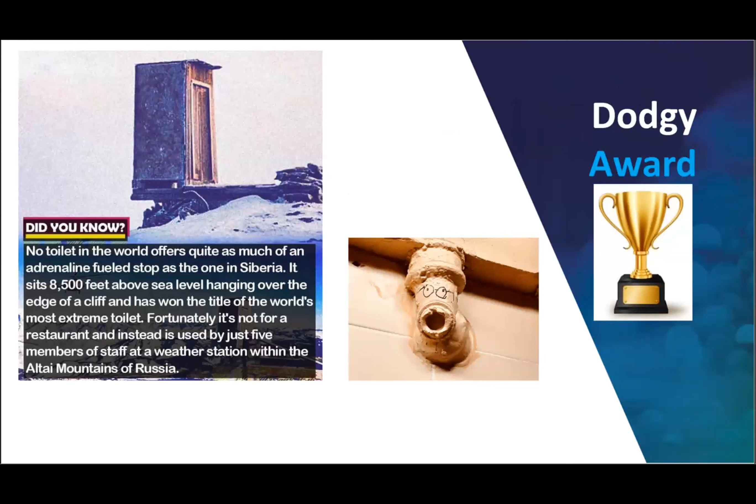Okay, that's the general meeting closed, so it's pretty quick. How are we doing for time? What time is it?

10 to 7, okay. So we had a chat this afternoon about strategy, and one of the things that came out of that was obviously a lot of initiatives, but a lot of people come and sit in the same places or come and sit with the same people. So we're going to try something. I haven't got what I needed to have, but we're going to get, obviously, who's here for the first time?

There's a few people here, yeah. So let's get everybody on their feet. Everyone, on your feet. Okay, what I want you to do is go and talk to someone for about a minute or 2 minutes, and give them your name, where you're from, and a fun fact. We're going to do that a few times, and it's all about meeting someone you don't know, someone you've not spoken to before, okay? So I'll give you a little signal and it'll change again, okay? We'll do that a couple of times, all right? So go.

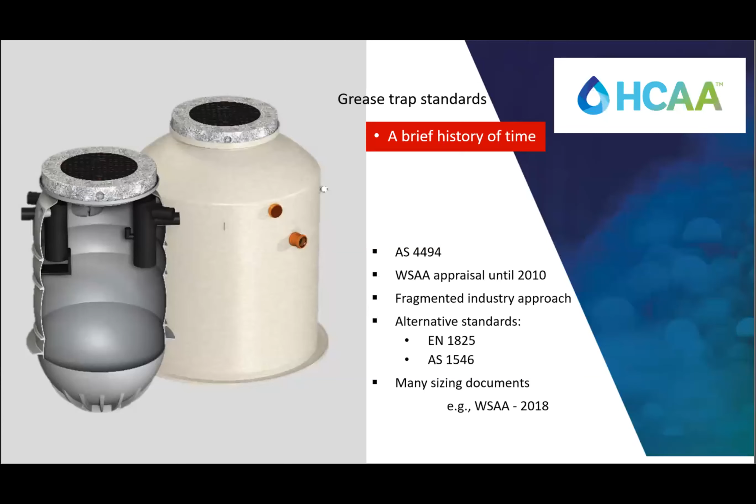So that's where we've been, but back to the draft standard now. We've been working on this for about 3 years collectively, and it finally came out to public comment a couple of months ago. I think Emily shared a link with it to you, and perhaps will share another one this week or tomorrow, so you've all got the link to have a look at it.

This standard is a guide for manufacturers to develop products that will work in the Australian market. Generally, there's not massive changes from what's already being done, just some general sensible advice or parameters on how the grease trap needs to be designed to positively influence performance. I'll talk more about that in a sec.

One thing to note is that there's no lab test in the standard for assessing the performance of tanks, so there's nothing to benchmark a particular product's performance against another's. There is a section on in situ testing, but because each application is so different - the type of food, the size of the restaurant, the size of the trap, the heat of the wastewater, and so on - it doesn't really give you any understanding of how a trap's going to perform relative to another one.

I think the main challenge for you guys is the sizing, and this standard now includes a sizing methodology. Again, it'd be up to each water authority about whether they accept this, and what comes out in public comment, but it could potentially be quite a big change. So I wanted to talk about that today.

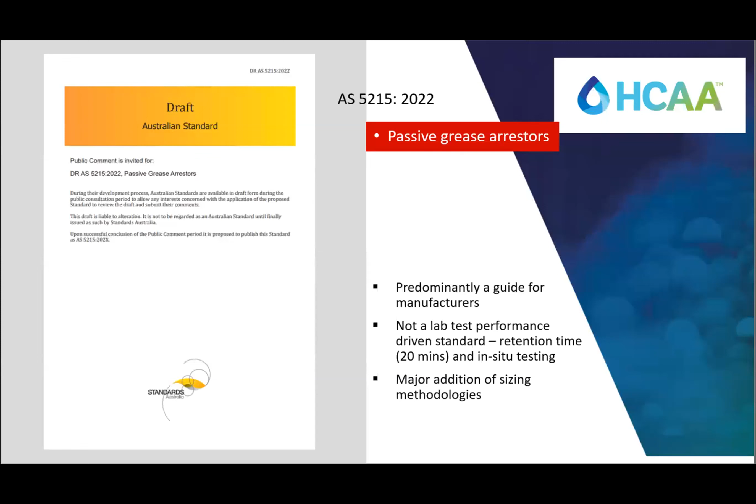I'll start with the easy stuff - some of the product design requirements that the standard has outlined. These are logical things like specifying a 70mm distance between the inlet and outlet, which has been like that forever and a day. Also specifying vent locations relative to the water level, so there's no backup. It's really just covering off the best practice design for traps that we're already used to seeing in the market.

Because this isn't a performance-based standard with a lab test, there are some performance-based design requirements brought into the standard that just help separate fats, oils and grease from wastewater - things like needing at least a 10% air gap above the water level to promote cooling and better separation. So looking at this draft standard, you can expect to see very minor changes to the products you already see in the market, nothing major.

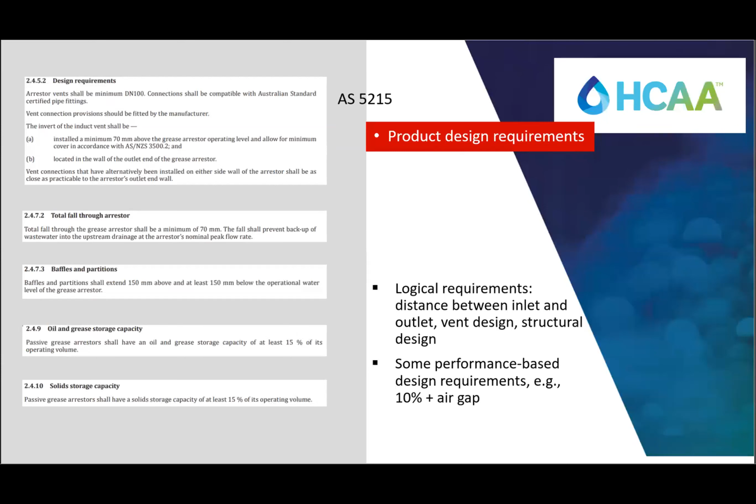Now on to installation. I picked out a few things I think are most relevant to you guys. The standard at the moment, the draft standard, says the maximum depth for the trap installed from finished floor level to the base of the trap is 3 meters.

I think for some applications this could be a little bit shallow. We know that trucks can pump out up to about 8 meters, but that's probably a bit too much for servicing, so perhaps the sweet spot's somewhere in the middle.

Another installation query that's come up over the years is clarity on the amount of clearance you need above a grease trap. The standard asks for the same depth of the trap to be above it, but it does allow for 1 meter when you can't achieve that. That was kind of an unwritten rule, but it's good that it's been put in print now.

I was reading through the draft comments today, and one thing a lot of people have commented on is spill containment. For above ground traps, the draft standard wants some bunding to contain any spills, but there's a lot of comments on that because it's not really seen that much in the market.

Now, in terms of servicing the trap, the standard says the trap needs to be emptied at least once every 13 weeks, but it does also give other service frequencies. So if your trap's undersized, you can increase the frequency, so an underperforming trap can hopefully be made performing without having to take it out and put a new one in.

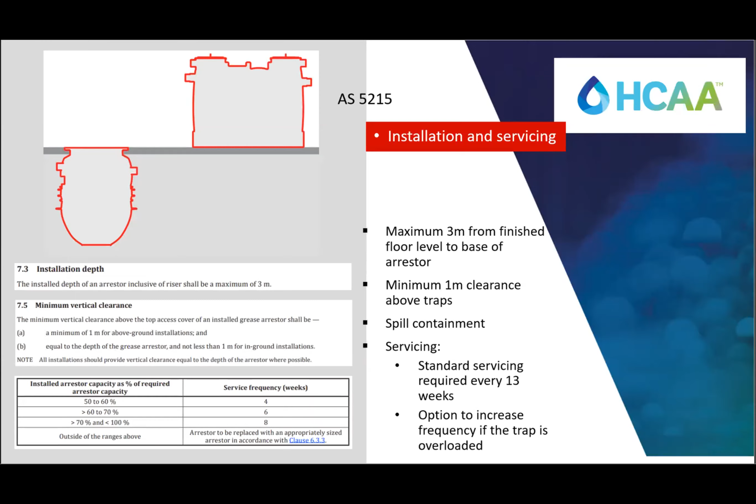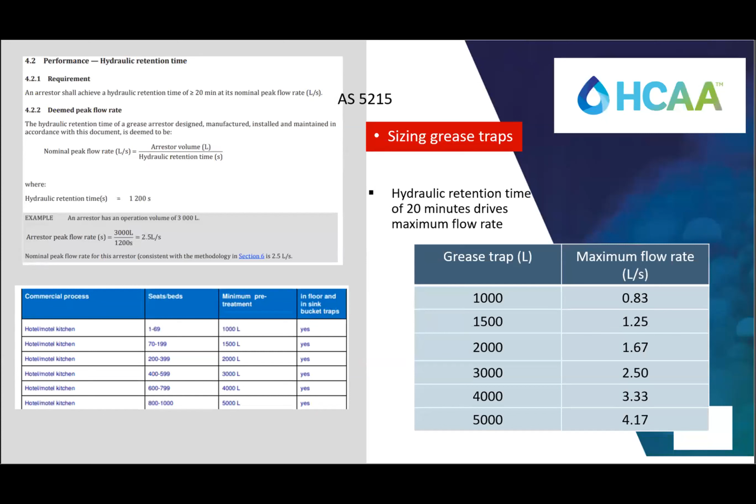So onto the sizing. The first part's really easy. This is based on maximum flow rates to meet a retention time of 20 minutes, which is generally understood as the optimum time to separate fats, oils and grease from wastewater. For example, a 3,000 litre trap would have a maximum flow rate of 2.5 litres per second.

In addition to these maximum flow rates is a sizing methodology. This uses the fixture unit sizing from AS 3500 to give a value to common fixtures. Now, I know that data is a bit out of date, and I think that might be updated in the next plumbing code as well. I know the chairman's aware of that as a possible issue going forward, but the standard would be adjusted to suit that.

So once you've worked out the number of fixture units that you've got, you then look at the graph, which gives you a peak flow rate. For example, if we had 15 fixture units, this would equate to 1.5 litres per second.

Now, in instances where AS 3500 is missing a particular fixture that you might need for your application, you can just take the flow rate from the manufacturer of that item and convert it into a 20-minute flow rate.

So just look at that same example I used before. We take our 1.5 litres per second flow we just worked out on the graph, and then multiply it by 1200 to give us the 20-minute flow rate. If we know we've got an additional flow from an unlisted fixture unit at 0.5 litres per second, we'd also multiply that by 1200 to give us the total size required. In this case, that comes out at 2,400 litres, so we'd likely just size up to 3,000 litres to be a more commonly used size.

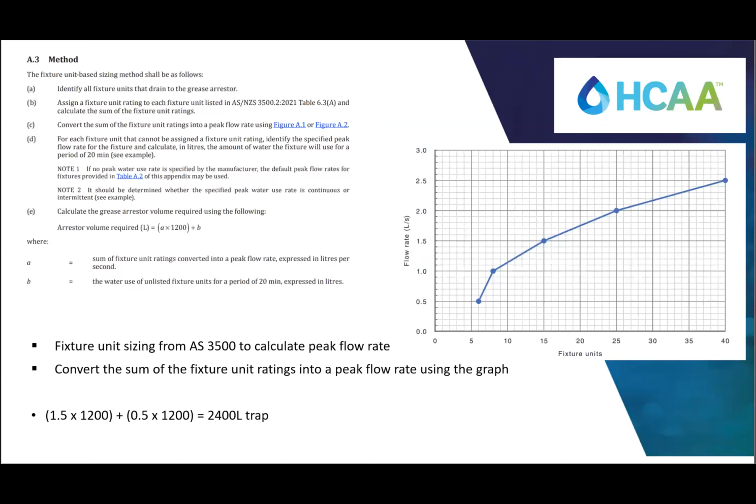Now, if you've got no idea what's going to be going on inside that commercial kitchen, you can just size up the trap based on the maximum capacity of the inlet drainage. I was chatting to Rod earlier, and I know he had a concern, perhaps he'll talk about that, that this might vastly overinflate the size of the trap that's required.

What would be quite interesting, to better understand the sizing that's been proposed, would be to use a live example of a project, or one you've recently done, so we can compare current Sydney water sizing with the 2 or even 3 sizing methods proposed in the standard. So if anybody has got a project you're working on that you think is suitable just to have a quick look at, please let me know. I'd just love to run some numbers with you and see how that compares.

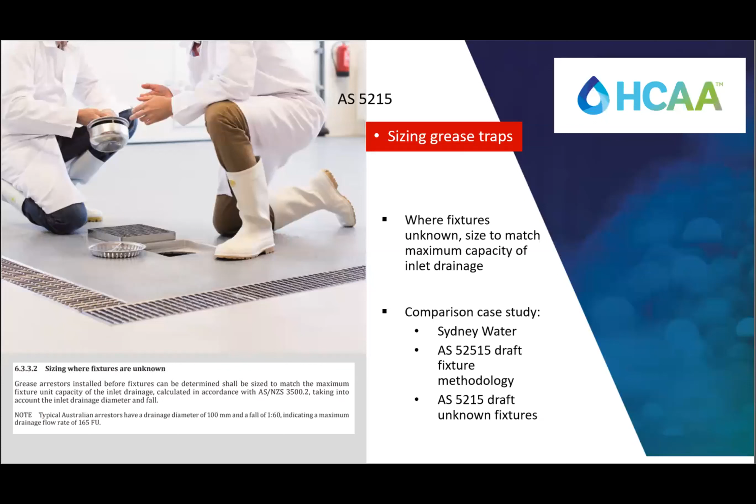So public comment, the standard came out probably 6 weeks ago or so, but it does close this coming Friday, so you haven't got long to read this. I know it's probably going to be top of the pile of your bedtime reading, I'm sure, to get through this week. But your comments at this stage really do make the standard better.

So if you have got time and you're interested in it, please do have a read. It's really easy to submit your comments now. As you read through, you can just submit them as you go, so it doesn't actually take you that long. Once this public comment period's closed, the committee will review all of those comments, integrate them hopefully, and then publish the standard.

So I imagine that it'll be published probably early next year. And there's normally about a 9-month grace period for standards for both manufacturers and designers to kind of start using them and get to know the standard. And of course, once it's live, HCAA will share some information that's been published as well.

So I just want to open the floor to questions or comments and discussions with each other as well. If anybody has anything they want to chat about. I might not be able to answer it, but somebody else might. Any questions?

So your thing is passive grease traps. Is an active grease trap a DAF unit? What's the definition of what passive means? Passive is just no biological or mechanical means to aid grease separation. So no skimmers, no DAF, no dosing.

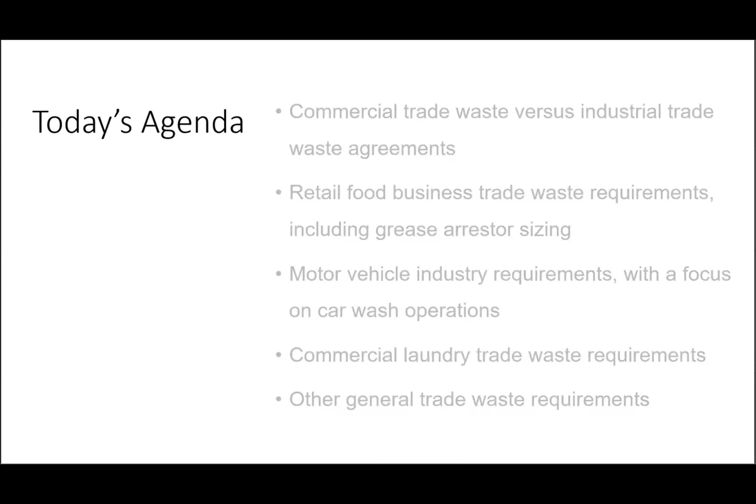So, industrial wastewater. Industrial wastewaters are a bit complex - they vary in quality over the day, over the week, depending on how operations happen on site. That's defined as industrial waste, meaning we individually tailor the agreement based on the risk the customer poses for us, in terms of protection of our assets, the treatment process, and the environment.

I'll go into more detail about the risk at the end. There is a very strict, higher level of requirements for the customer to meet with industrial agreements in terms of ongoing monitoring and reporting. We also have auditing and audit sampling, and even one-on-one discussions with the customer about performance and progress.

At Sydney Water, these industrial agreements are managed based on the pollution load discharged into Sydney Water, and they need to meet our acceptance standards. Our acceptance standards are on our website, so the customer must meet the acceptance standard.

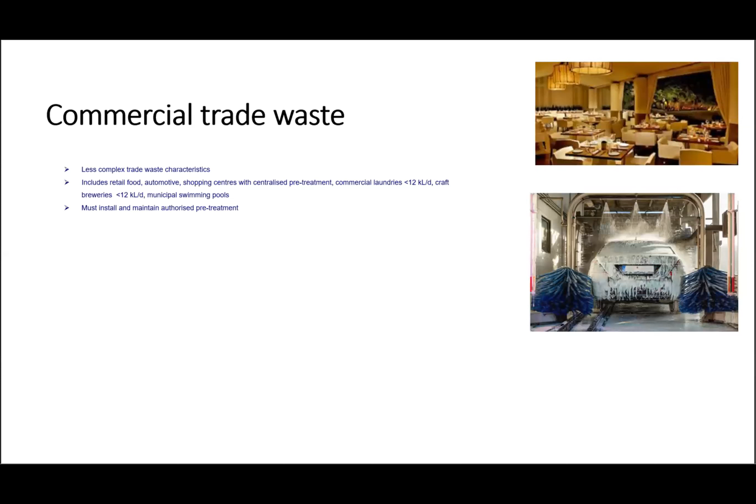Commercial permits are issued with the condition that they install approved pre-treatment processes. For example, food processors will have grease arresters, motor vehicle industries would have oil water separators, and laundries would have cooling pits and lint arresters. I'll go into more detail on these.

So, retail food outlets - our standard requirements are covered in a comprehensive plumbing guide, mainly about plumbing for the food industry, that gives you what is required. The highlight is that if a premises prepares or serves hot food - even if you prepare the food outside but serve it hot on premises - you need to have a grease arrester. Grease arresters are generally sized based on the seating capacity for the restaurant, but we do use other methods as well.

For example, if it's a hotel, the bed size is also taken into account. If the food prepared on site is highly greasy, for example a barbecue food preparation place, that needs a larger size. This information is available on our guide so you can get more details. Our minimum requirement for grease arresters is 1,000 liters, 1 kiloliter.

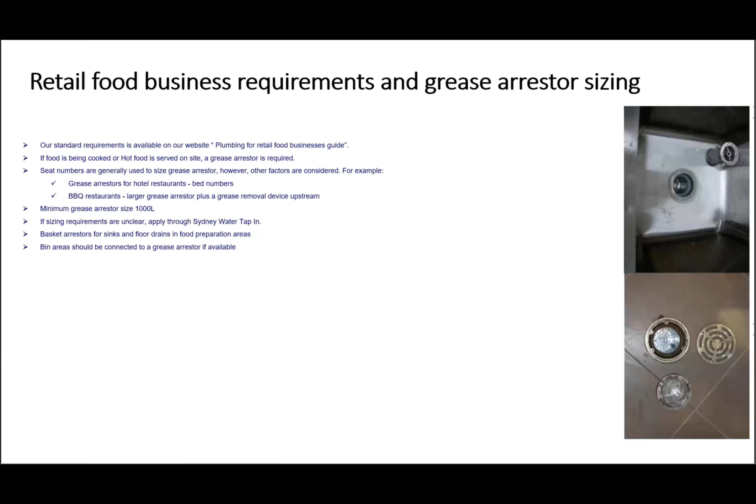The next one is about the motor vehicle industry. So motor vehicle, particularly I'm paying attention to residential vehicle wash facilities versus commercial. There are different requirements.

The residential facility doesn't need a written permit from us, but they need to meet our minimum requirements. That includes having a bunded and roofed area, so no rainwater enters the Sydney Water sewer. The bunding also prevents wash water entering the stormwater environment. It's a general requirement, same as commercial food outlets, that they also have basket arresters to capture the coarse solids.

There must be signage because you can't do mechanical repairs or degreasing on residential facilities. So there must be signage on the site clearly saying that should not be done. There needs to be a minimum of 1,000 liter collection tank or 1,000 liter per hour oil water separator. The pre-treatment must be maintained according to the manufacturer's requirements.

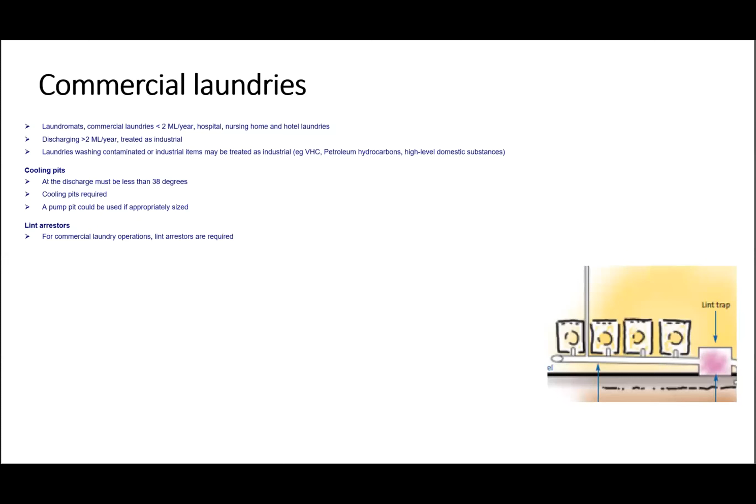General trade waste-based requirements. As I said, all the trade waste generating areas need to be bunded to prevent the trade waste water entering into the environment or stormwater, or the rainwater entering into the sewer. And there must be a roof with a 10 degree overhang. So if there is an open side, that needs to have a 10 degree roof overhang, so that it's from the bund to the roof line, which prevents the rainwater entering into the system.

Another important area is about chemical storage, chemicals and oils and things like that. They need to be stored in separately bunded areas, because those pre-treatment devices are not designed to treat large amounts of oils, grease, or chemicals entering the trade waste. That becomes a non-compliant discharge. So for that reason, all chemicals and oils need to be separately bunded. And if there are accidental spills or anything happening, that needs to be collected and disposed of properly.

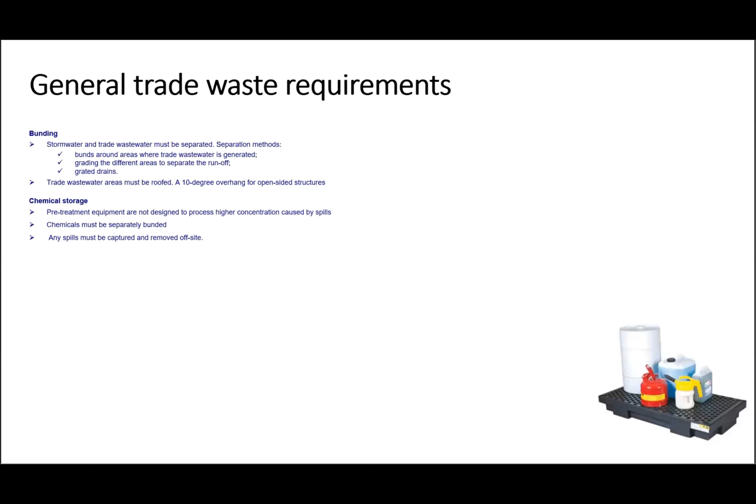Other main requirements: if the site is a trade waste site, it needs to have backflow prevention. High hazard backflow prevention devices need to be installed. They need to be tested and reported annually to Sydney Water. And there needs to be additional backflow prevention devices on the taps where there's a trade waste generating area nearby.

Accessibility of the pre-treatment devices is also important. So if they are taller than 1.2 meters, either grease traps or oil water separators, they need access platforms conforming to the Australian standards. I think that's a brief note about our trade waste requirements.

Happy to answer questions.

Can't stress enough - yeah, we love having you guys here. We're not trying to Sydney Water bash or have a massive go at it. I kind of reiterate Mark's comments. Having been around for way too long, when I first started there was a really amazing set of hard copy documents available. My bosses had them, they shared them with me. I should have photocopied every single one, I didn't.

Okay, Greg. So in your presentation, in one of your earlier slides - could you go back again - you said something about retail and cooking food off-site. If food was prepared off-site but delivered to a site, you needed to put a grease trap in.

I found that ambiguous, and you define it as hot food. What is the definition of hot food? Is it greater than 38 degrees? The code doesn't tell you what that means. My brain goes back to Silverwater Prison - it has about 2,500 men and 600 ladies, and they have a central kitchen. All the food is prepped there, it's called cook-chill, then delivered on trolley trucks into the inmate area and reheated. There are no grease traps in these large 900-bed pods, and I didn't know what you were trying to tell me there in that particular topic.

This is hot food we're talking about. You can have a caravan park connected to the sewer, and you go to the shop and bring a hot meal home that's cooked elsewhere. So I wanted you to clarify that point, please.

Essentially the reason behind it is, if you're serving hot food and that hot food's plates and cutlery and things like that are washed on site, that's going to generate the grease - the same way it's generated when preparing the food. So that's the reason why we require grease arresters. Thank you.

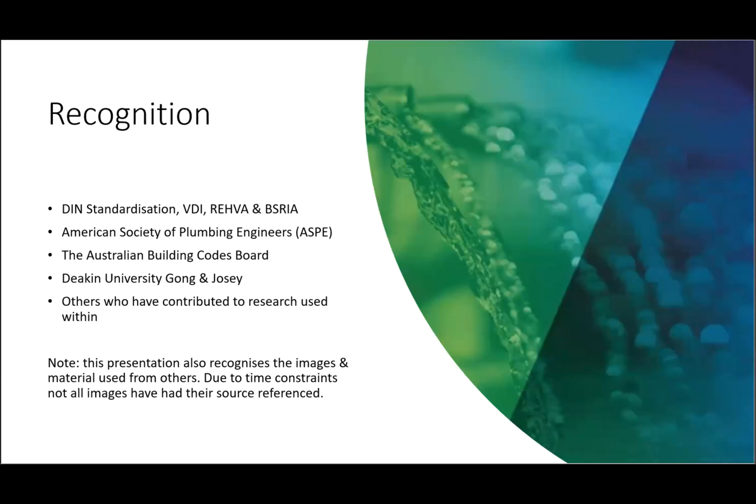So what is water quality and water hygiene? Water quality is basically the chemistry of the water, what will be contained within the water and the like. And hygiene is controlling the microbial growth within the water supply, fit for drinking. So there's a few different processes to look at when considering this.

So what effect does water quality have on water hygiene? The age of water is really important, because the longer it sits there, the more degraded the chlorine or whatever oxidizing agent might be present in the water, and the greater ability there is to then harbour and grow microorganisms. Hardness is a bit of a problem as well - it's probably something that's not looked at very often, but scale on pipes and the like caused from hard water makes a nice home for biofilm to establish.

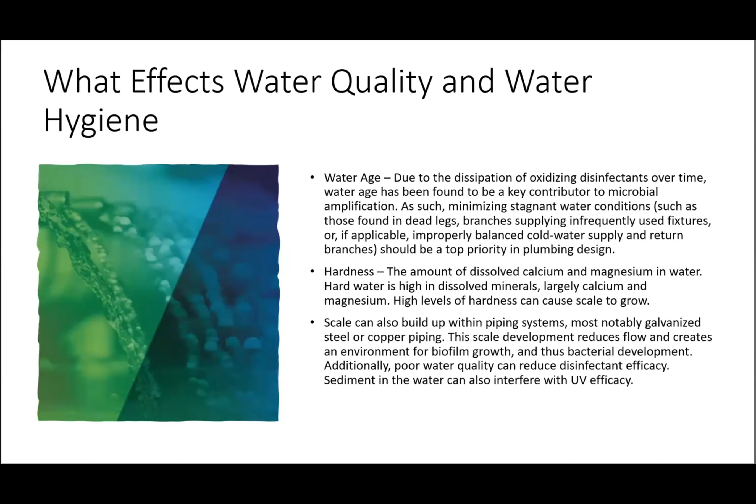Some of the things to think about is managing some of those aspects prior to starting. So what's the benchmark? What is one indicator? A plate count is an indicator that can tell you how healthy your plumbing system or water supply system is, how healthy the water coming into your building is. So it's a good starting point before choosing what sort of equipment you might use to remediate your water quality or hygiene.

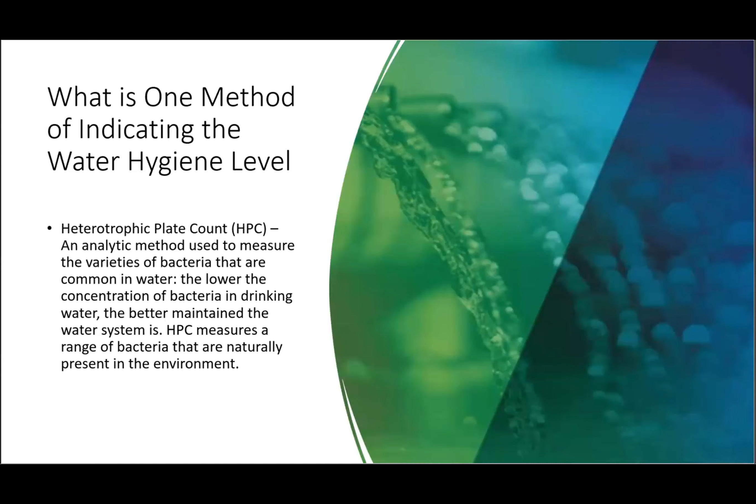So what are some of the key things to consider? Basically, to start with, you really need to clean up the water chemistry, i.e. correct the hardness before starting anywhere. The next one is to remove the organic material, which is basically the food source for microorganisms.

The next part is to provide flushing points, so you can manage aged water and also potentially remediate a bit later down the track. Minimizing pipe sizes and also thinking about storage manages age and obviously surface area for biofilm to grow on.

Introduce a mechanism to kill, which is basically what we'll be talking about. After killing, you might want to consider what you need to mop up - there might be some removal of organisms that have been disabled. Maintain a broad spectrum oxidizing agent, something like chlorine through your system, but be cautious not to strip the chlorine out of the water, which is something we'll be talking about. And ensure that you can remediate, so flush and dose at a later date if anything does happen to go wrong, which it does.

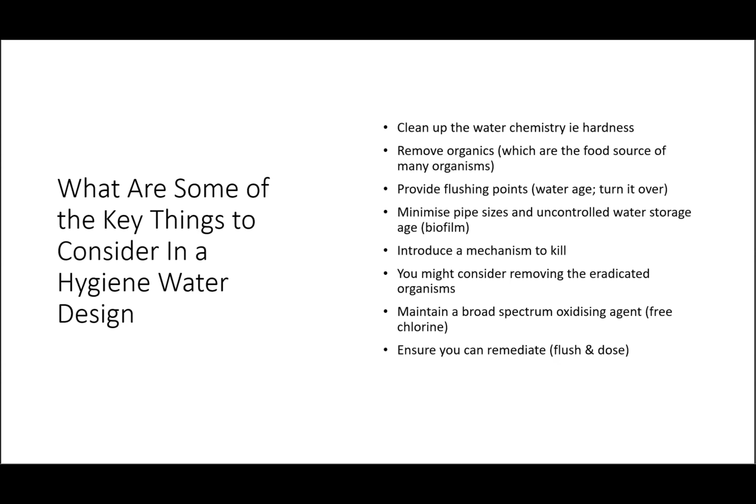So it's probably a terrible slide to read, really.

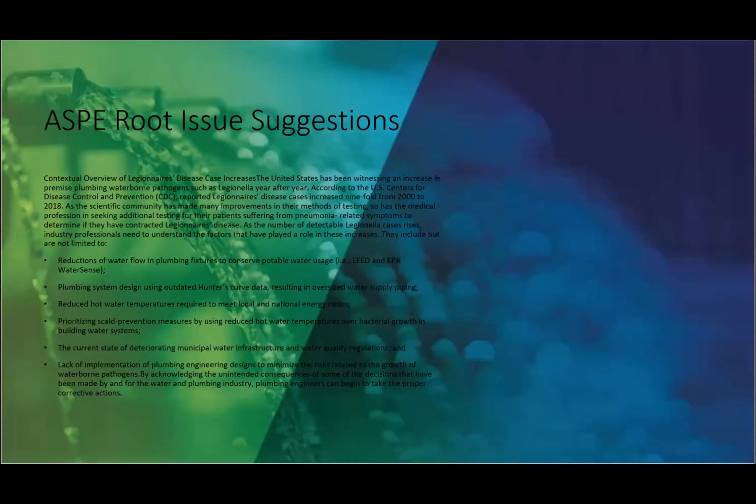So these are some of ASPE's suggested root causes, which basically align with what we've just been talking about. One of the key things there that they've talked about is pipe sizing. So I guess where we land is there's right, wrong, and there's some things that depend on how right or how wrong you might have been.

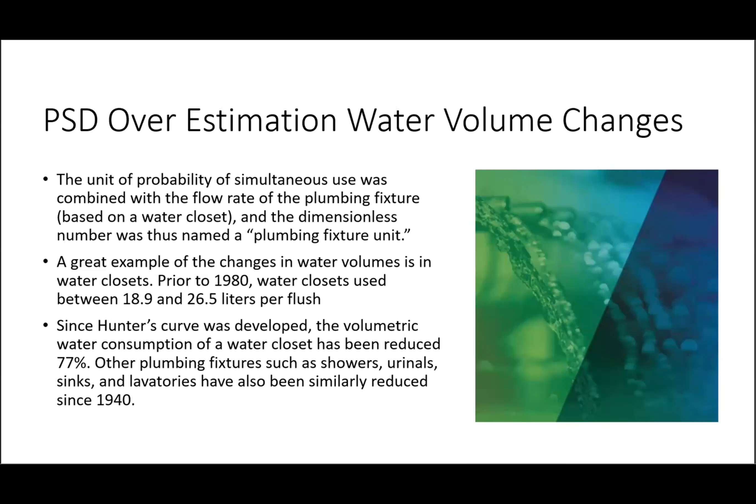So PSD overestimation. The PSD estimation that we do at the moment is based on 1940 data, kindly produced by Hunter, based on a probabilistic theorem, and not necessarily validated on recent empirical data or anything like that. So we're pretty old, and when we look at the differences between flush volumes in toilets, they're massive back in the day compared to what we're looking at nowadays. So you can see from this slide we start to talk about surface area, because the bigger the pipes, the greater the surface area. So we could be madly overestimating our pipes.

Our friends at Deakin have, in their recently published paper, identified how massively overestimating the Australian standard currently is. The big red bars are the Australian standard. The blue is the measured, but because of the time grab intervals, there was a correction factor of 1.3 applied. So have a look at the greens with the cross lines - as you can see, we are measuring massively smaller flows than the huge overestimation that the Australian standard's doing. And that overestimation is to the degree of 217% to 326%, big.

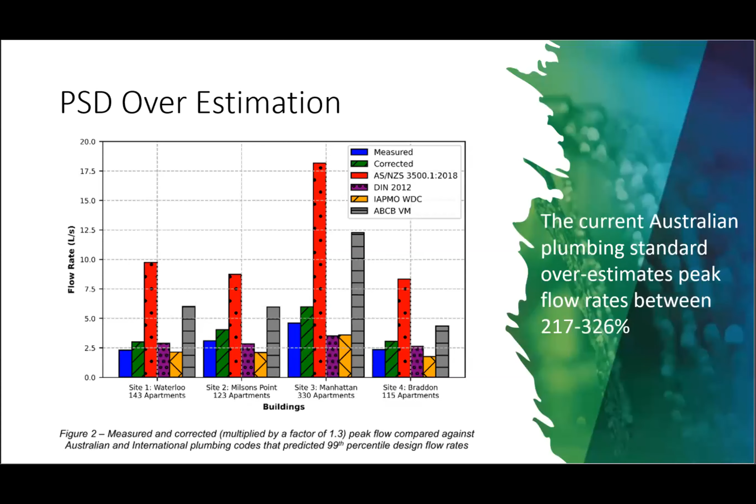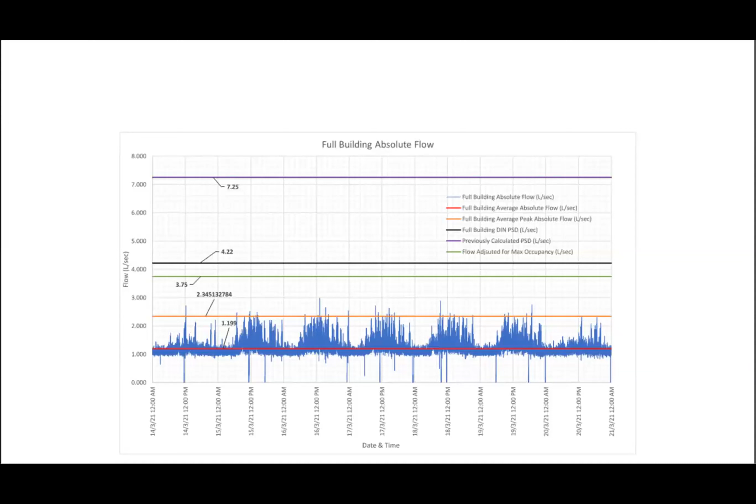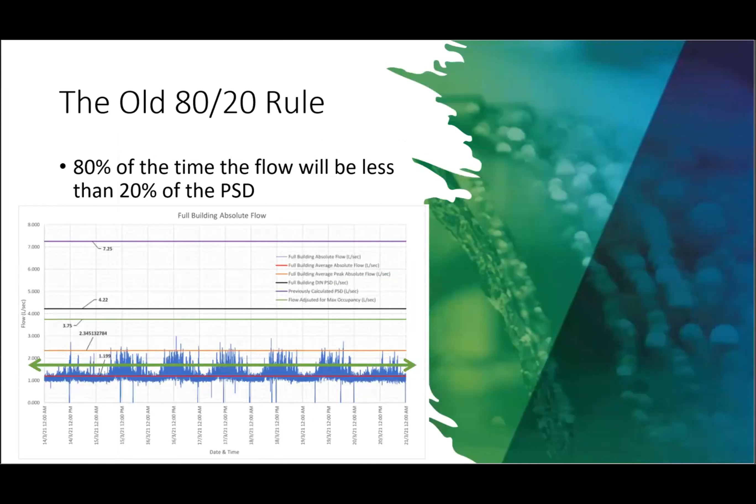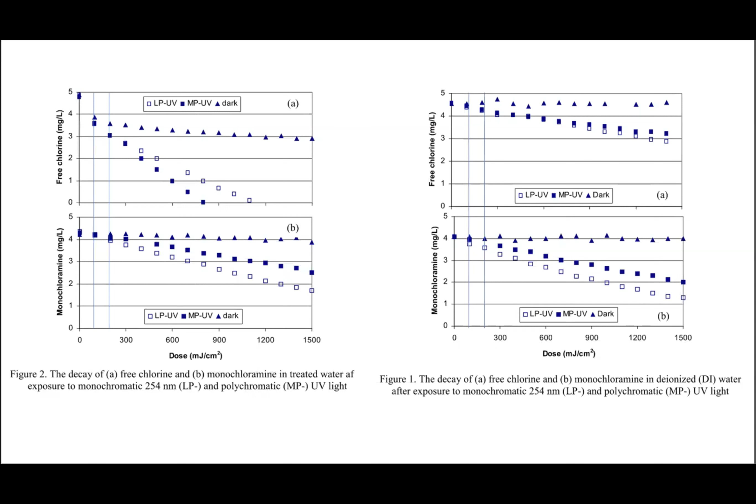So this here compares deionized water against drinking water. It's a much better controlled environment with DI, so you can probably get to see a better effect as to how UV affects chlorine in the water supply. Reason why - because this one has a lot of organics and other materials in there, which will obviously oxidize against the chlorine, therefore reducing the chlorine rate more dramatically than not. So you can see that from a dose up to 200, there's probably little to no effect on chlorine based on a UV dose. So I think these sort of need to be read in conjunction.

So what does all this mean?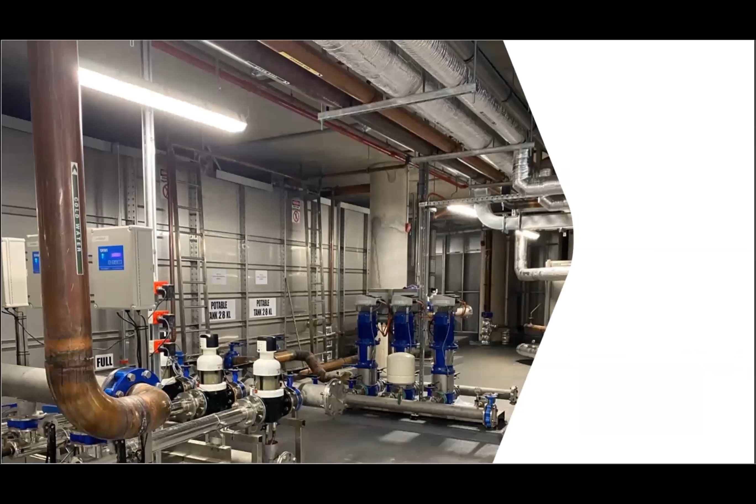This is a pretty bad photo that I chose, but I couldn't find a worse photo. These are 3 UV dosers in a row. One is turned off, but let's just pretend that maybe a few more are turned off. But let's pretend that this is a standard setup - all 3 of those would have been sized to the maximum PSD.

Maybe a more appropriate method would be to size based on a very average flow. The thought being, you've captured most of the water that's used within the building. Yes, you've got a statistical failure because a few parts of the water have actually got past your UV doser without a dose, but in the whole picture of things, so long as you're managing your water age as well, you probably haven't seen a great degree of detriment to your system, noting that we're talking about town's main drinking water here.

And that's why you need to clean up, yeah.

I was just going to follow up on your question about Legionella. Anywhere water can stagnate is a potential risk factor for Legionella, so it doesn't matter where it is - a hospital or your home. If you've got a second bathroom that's not used very much, it can actually grow in the shower head. So it's good to flush things before you actually use them.

What we are finding, though, is a lot of focus now on Naegleria fowleri, another opportunistic pathogen. It causes primary amoebic meningoencephalitis, and it's nearly always fatal. We've seen one or two examples now where it's been contracted from the distribution system. There was a case - it's normally found in recreational waters and can go up through the nasal cavities into the brain - but we've seen a case, I think in Arizona in the States, where a small child died, and they figured it was probably contracted through the distribution system.

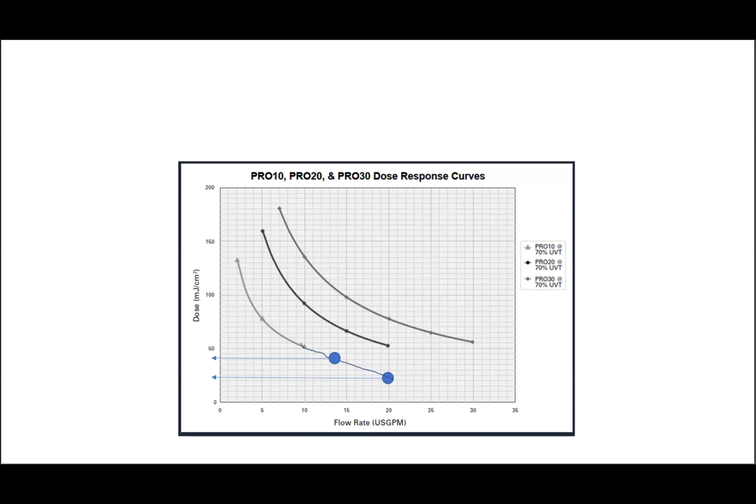And then it becomes less effective. So it's really important, whatever application you're going to use it for, that the water quality is right. It's not one of those systems that's a silver bullet, if that's the term Tom and I were talking about — that common term isn't really accurate. I think it falls back to this: it's got lots of limitations. But it does work really well.

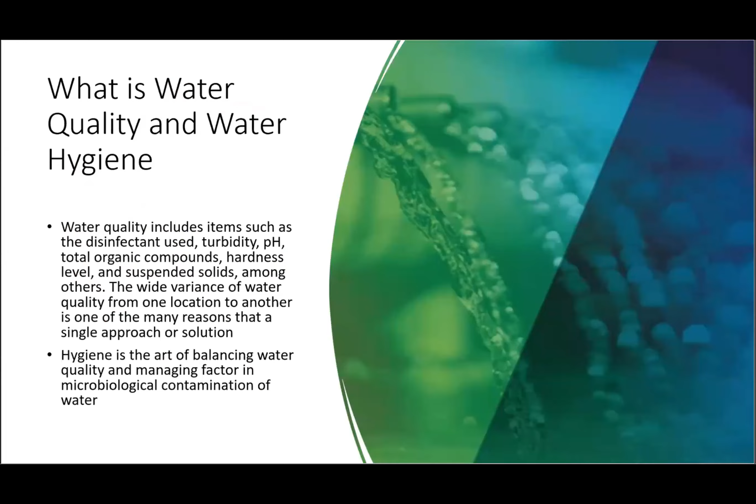What we talk about is UV dose, which actually has residence time as a factor as well. So you have to be aware of it. That's why when Tom showed all those graphs, the higher the dose means higher intensity plus more time in the UV chamber itself. So it's a very good science — the technology, and the scientific way it works, is really good. But it has to be used the right way.

It's not one of those solutions you just plug in and it's going to work. Until they make variable speed driven lamps, it's not there yet — something that actually detects the flow rate and the water condition and adapts to it.

Fantastic. Has anyone got any questions? I've got one question, Mike.

Ryan, do you see filters or UV getting written into the code, and not just as a good-to-have?

Well, I might answer that question in another way. I heard that Fair Trading are picking up filtrations and softeners that are required to remediate certain water conditions as performance solutions, which I think is a bit detrimental to public health and the best interest of the public. And when you read the performance requirements, it says don't contaminate the drinking water supply and keep it fit for the public. So that's a bit of a controversial comment, but I think Fair Trading in New South Wales needs to take a better stance on water hygiene.